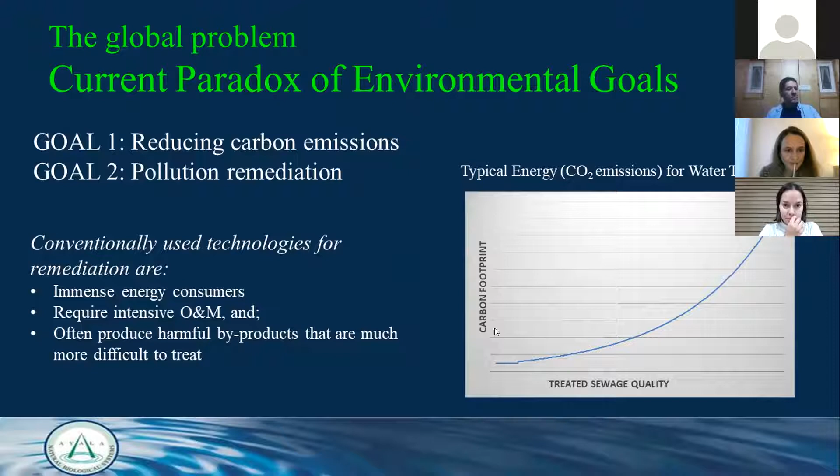So this is actually the graph showing the connection between carbon and water quality. As I said, more water treatment means more energy, and the graph goes up in a never-ending story. This is the way it usually is, and this is how it can be instead.

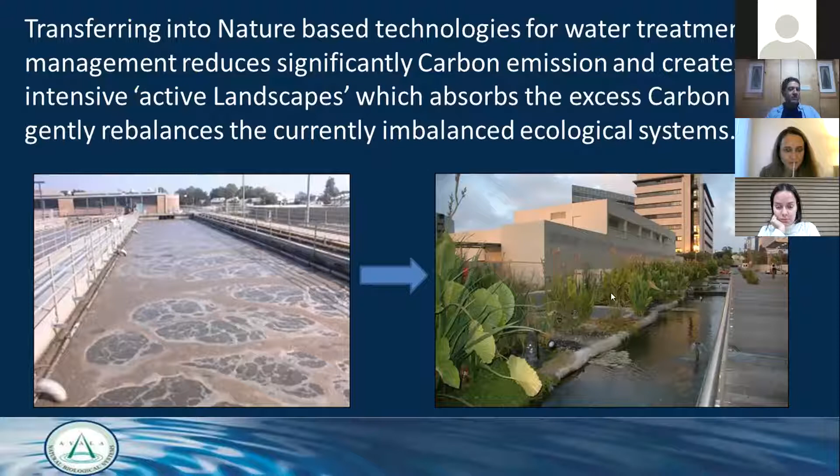This is a system doing the same and much better, treating all kinds of pollutants as part of your landscape. This is a much bigger one, a bigger STP treating something like 5,000 cubic meters per day, and it's part of your landscape. We call it the active landscape.

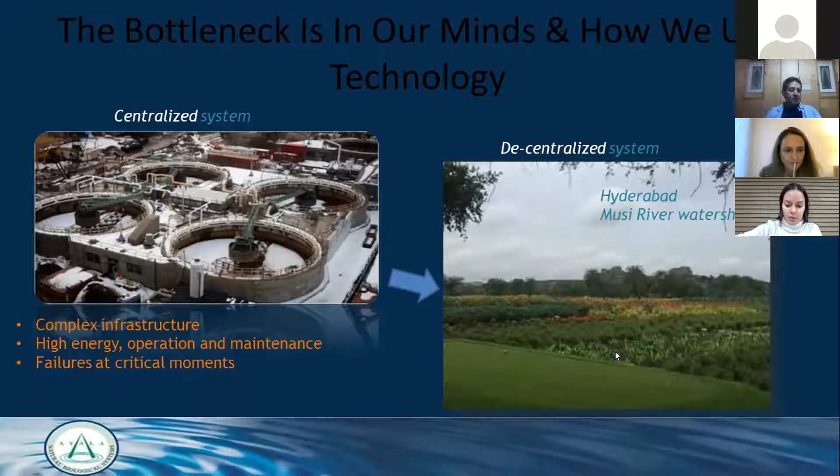But it's much more than just treating water. When talking about the environment today, it's also about skyrocketing carbon footprint, aquifer contamination, lack of water security, aquifer depletion, floodings, air pollution, etc. The solutions given today are each dedicated to one problem, but what we're doing in Ayala is giving a holistic solution for the entire problem at the same time.

You can see this is the architecture of the approach. We're using gravity, as you see over here, using substrates, plants, and special additives to get physical, chemical, and biological filtration all happening at the same time in this system, which is part of your landscape.

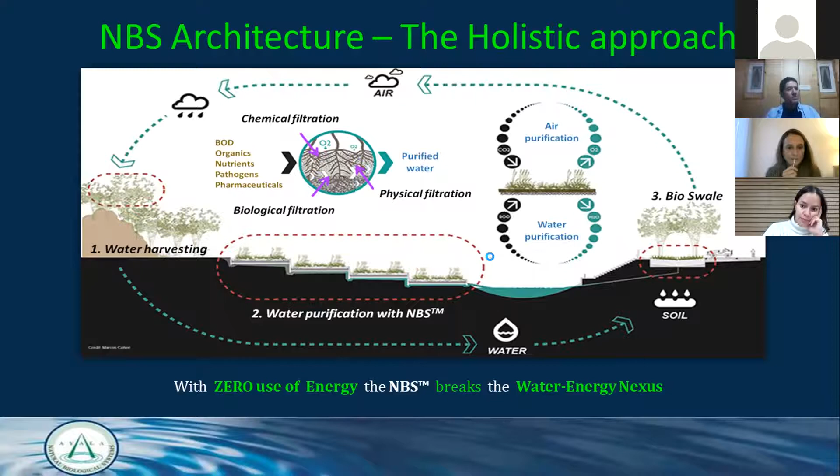This system also, at the same time, harvests rainwater, treats it, and recharges the aquifer simultaneously. There's no energy involved at all, so we're not creating any carbon. On the other hand, we're actually harvesting carbon from the air. The quotient is the opposite—we're reducing carbon while enlarging the green areas.

This is actually the solution. If you think about the world, the only way to reverse climate change is by enlarging green areas and reducing the use of energy. This is the only way to do it.

Nobody thinks about it this way, but when you manufacture something that uses carbon, you're again using technology, creating a never-ending story because it keeps using energy to treat energy, to reduce energy. It's a lock, a Gordian knot.

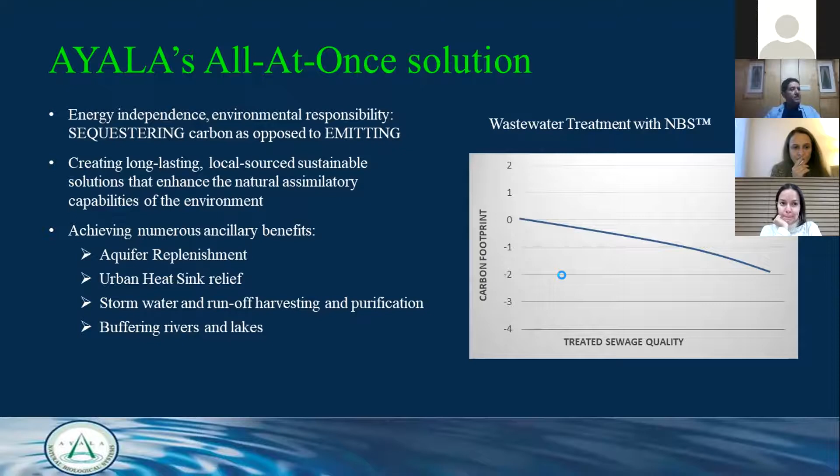But I want to speak about something even harder to approach: New Delhi, in the north part of Delhi, where we got a mandate to design a solution. Something like 8 million people live in this area, and right now sewage runs freely in the canals to the Yamuna River.

We designed a system that becomes part of the landscape, part of everyday life, treating the sewage while it runs all by gravity, creating a powerful green landscape that treats the water and harvests carbon at the same time, with no energy at all.

We stop rainwater upstream to prevent floods downstream. We treat the rainwater and stormwater and recharge the aquifer using special recharging elements. And of course, it's a beautiful park where people can now walk from the city all the way to the Yamuna, which they couldn't do before.

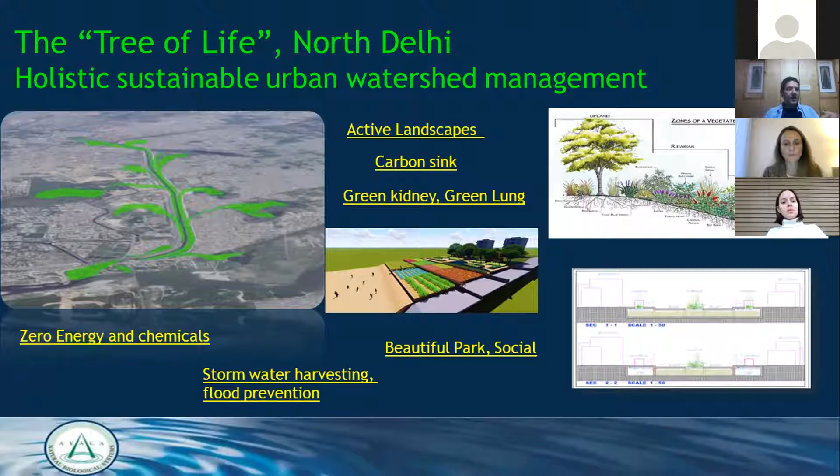These systems are very social—built by the people, using local commodities, and serving the people. This is the only way to keep it alive for a long time.

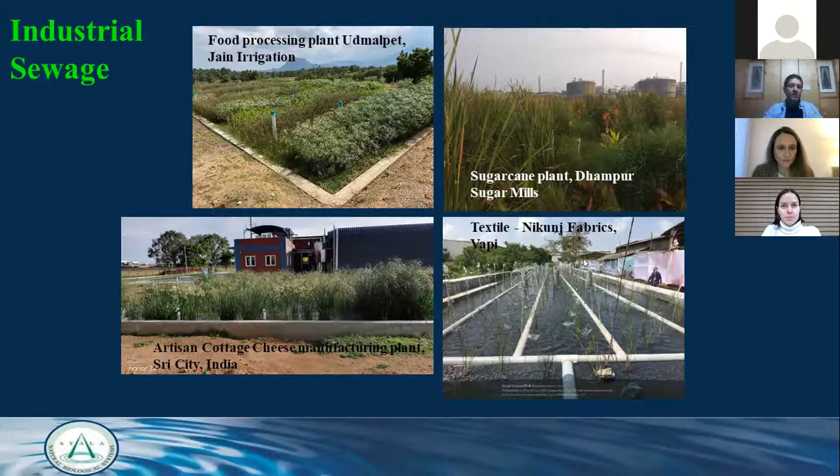And now sugarcane factories, which produce very hard water to treat, food plants, cheese plants, textile - it's all been treated by the same technology. The common thing to all of them: zero use of energy and zero use of chemicals, all by natural means.

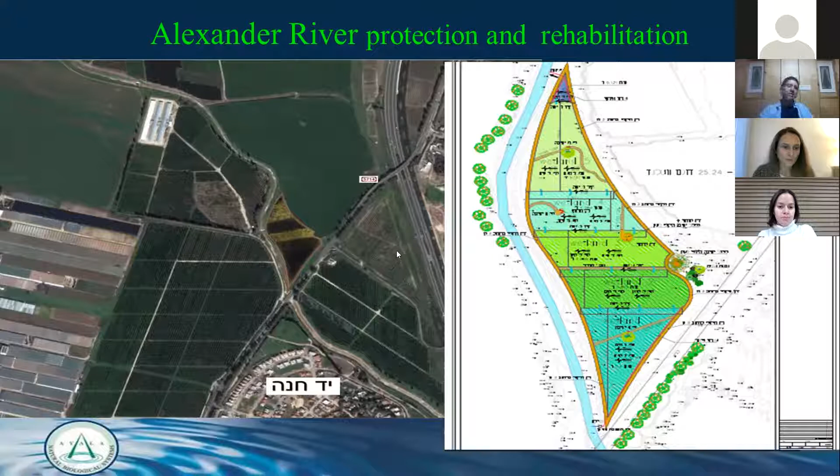This is another river we are doing now in Israel, called the Alexander River. It's one of the main rivers in the center of Israel, getting very raw sewage from Shechem, from the mountains - very bad water, 25,000 cubic meters per day. We're treating it, now under construction, using a system that will run along the river into the Alexander River.

So what I'm trying to show you is that the possibilities are endless. It can be done properly. It can be integrated into our life everywhere - industrial, domestic, agricultural. It becomes part of our life, using zero energy, zero chemicals, and becomes our park, built by the people who live in these places.

So this is actually a complete mind change, but that's the main problem: changing the mindset of decision makers to make it happen. As I showed before, it can be for a private house as well as for the city of New Delhi, which is the biggest populated town in the world today. So it can be anywhere.

And you don't need any conveyance systems. It's a decentralized solution, so you can implement it everywhere - in the city, in the industrial zone. In the end, we're actually introducing nature back into life, but doing it in an active way that works for us very efficiently. I could speak until tomorrow, but if you have any questions, you're welcome.

Yes, we are power consuming, yes we are generating sludge, yes we are treating wastewater in the more conventional ways. There are advantages and disadvantages for both options. It's a matter of scale, a matter of land requirements, and if these are available or not. But I will speak a bit about Aqwise in the world of conventional wastewater treatment.

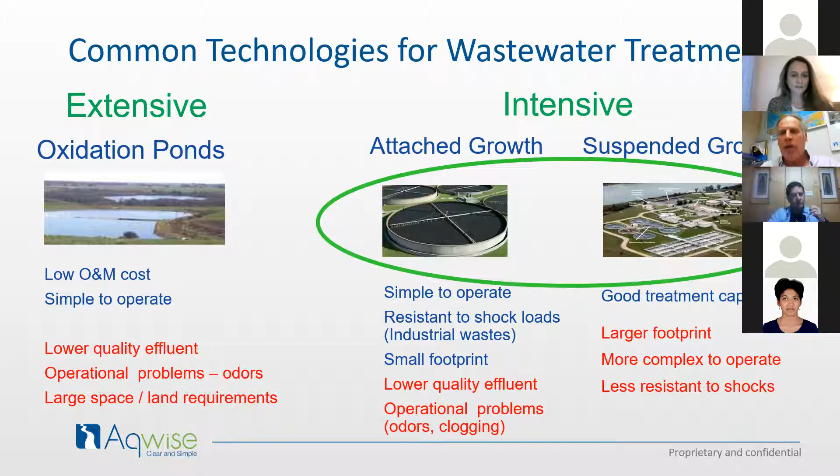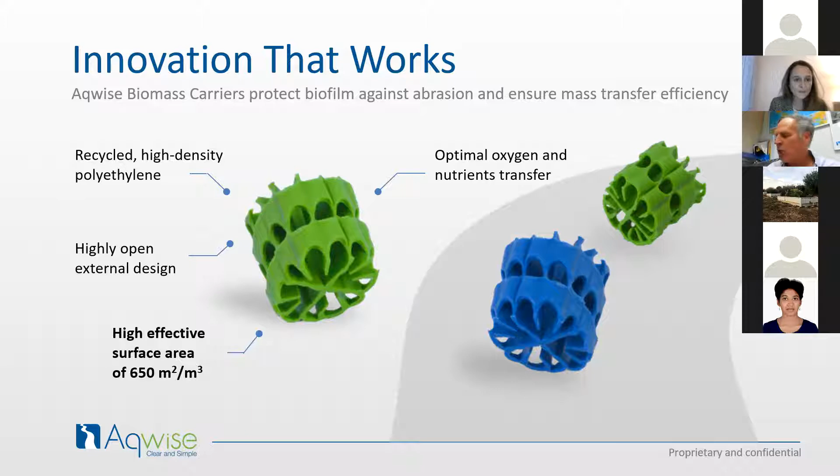In the biological wastewater treatment world, there are different approaches: intensive treatment, attached growth, suspended growth. We won't go into it, but basically Aqwise works in the world we call moving bed bioreactor, where we provide optimal conditions for the biomass that consumes organic material in the wastewater to grow on carriers, providing large surface areas so we can allow for large biological activity in small volumes.

Like I said, ours is power intensive, but it is minimizing space requirements, which is very critical to many customers, especially industrial ones, who have space limitations within their facilities for wastewater treatment units. And also for very large cities that need large volumes and centralized treatment plants, the MBBR technology allows this within a limited footprint.

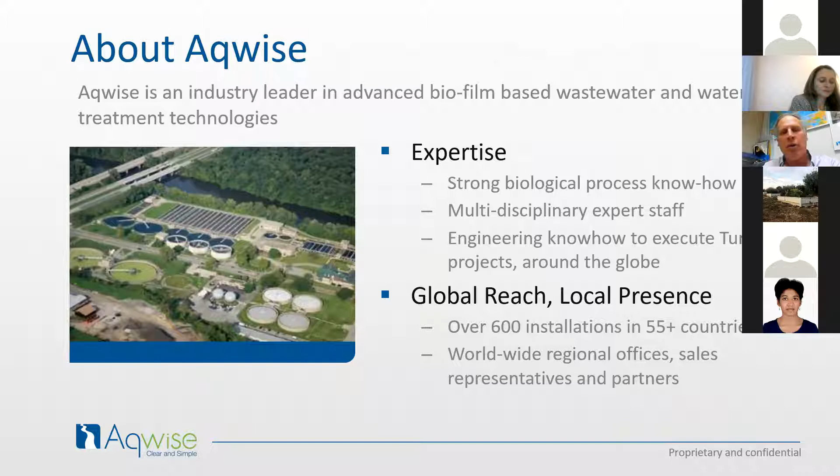I'll run through very quickly who Aqwise are. We are a technology-focused company that started 20 years ago, that has grown into a global company providing solutions all over the world. I won't go into this because it's not really relevant, but this presentation will be shared with you. We have offices worldwide.

We work in both the municipal and industrial sectors, providing solutions for new plants, upgrades, and expansions. Our technology is very suitable for taking existing treatment plants and enabling expansion of capacity or upgrading performance by applying the carriers into systems that use other technologies.

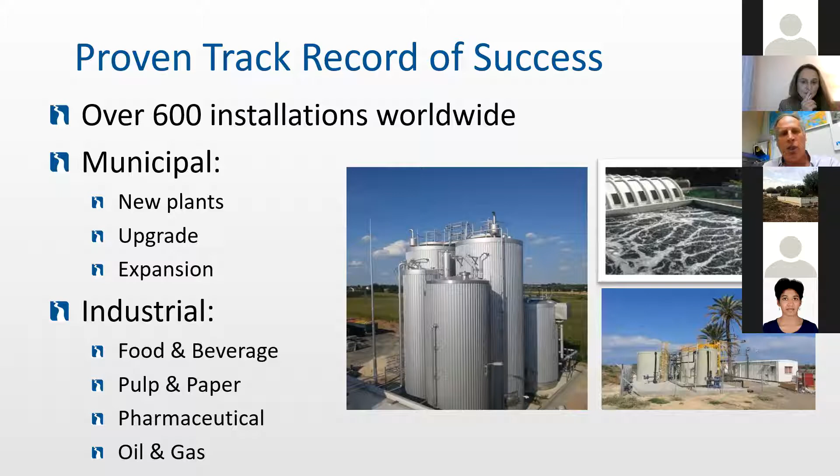This is especially important in large cities where they have increasing populations and have to increase the capacity of their treatment plants. By applying the Aqwise technology, you can do this without needing additional civil works and additional land allocations, which in urban areas is very expensive.

So this is what we do: municipal solutions, retrofitting existing plants, and minimizing civil works.

The same in the industrial sector. We work with industries that have high capacities of wastewater, like pulp and paper plants, like food and beverage factories, where the flow rates are very high, the organic loads are very, very high, and need special attention in order to reach the effluent requirements required by either the environment or the local sewage treatment plant that will accept the treated effluents from the industry.

So again, these are energy intensive processes that use a lot of electricity. They generate sludge, but they do allow industries in large cities to meet their effluent wastewater treatment targets.

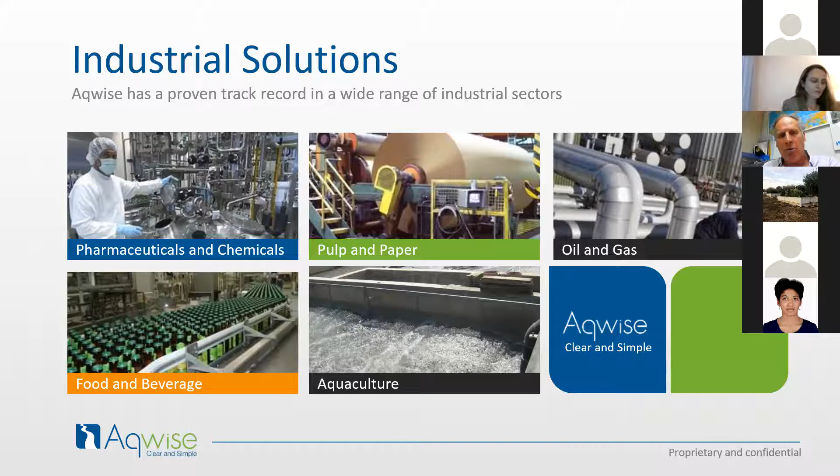Customer benefits: our plants are very small in their footprint, and this is very important to many clients, especially large cities. For example, the city of Hong Kong, because the value of real estate there is so high, they are willing to pay a lot extra to minimize the footprint of their sewage treatment plants because the alternate value of the land is much higher, as they build high-rise buildings on it.

So in dense urban areas, our technology provides an advantage, and also to industries which have limited space for wastewater treatment, they can apply this efficiently with our technology.

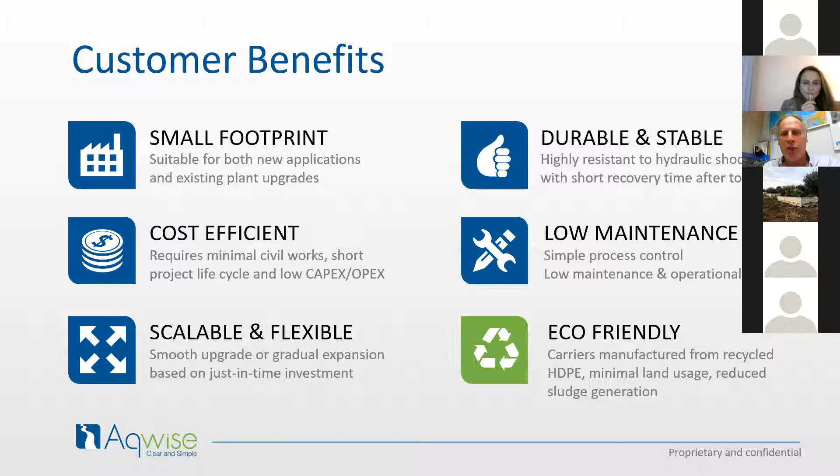Aqwise works in different models, but this may not be relevant to this discussion. We have been involved in the past in a number of World Bank projects through third parties where we have provided our technology, but we can also provide financing and turnkey capabilities.

We have our own in-house R&D facility where we are always developing new ways to apply our carriers and technology to the increasing spectrum of pollutants. They can be from the pharmaceutical industry, or from groundwater pollution with industrial chemicals. We are always advancing our knowledge so that our technology can be applied to all these new challenges facing us in the world of wastewater treatment.

And if you flow with the river 200 kilometers downstream, you'll reach the city of Agra, home of the famous Taj Mahal. And the Yamuna River is the source of drinking water for the people of Agra.

Another case where we apply our technology for drinking water applications is in Israel, and we know these conditions prevail in many places around the world where groundwater is contaminated by nitrates or nutrients from intensive use of fertilizer. We use lots of fertilizer for our crops, and we irrigate the crops, and eventually the excess ammonia, nitrogen, and phosphates percolate into the aquifer and disqualify large amounts of groundwater from being used for drinking water because of the contamination.

We apply our technology to remove nitrates. Nitrates, for those familiar, are what cause what's known as blue baby syndrome. Reducing the nitrate levels allows us to make contaminated aquifer water into safe water for drinking. This is a project we've applied in Israel, and it can be applied in many places where this problem is prevalent.

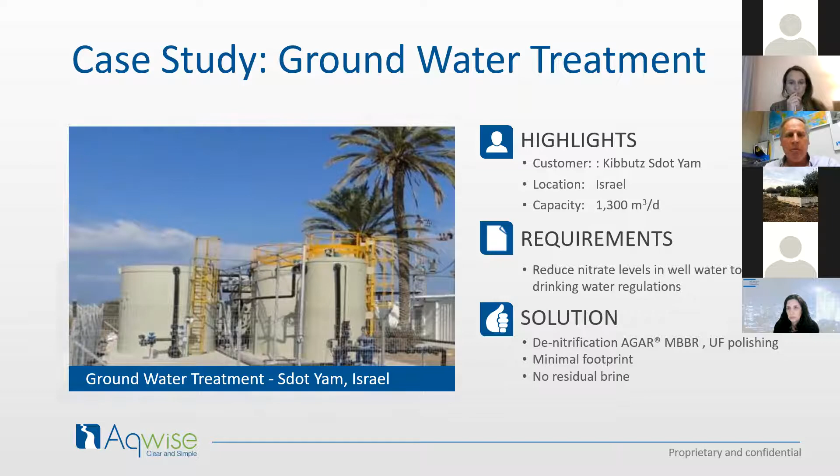These are more common conventional treatment plants. This one in Shaya, in northwest China, where we are treating the water to provide effluent quality that is used for irrigation of fruit orchards around the treatment plant.

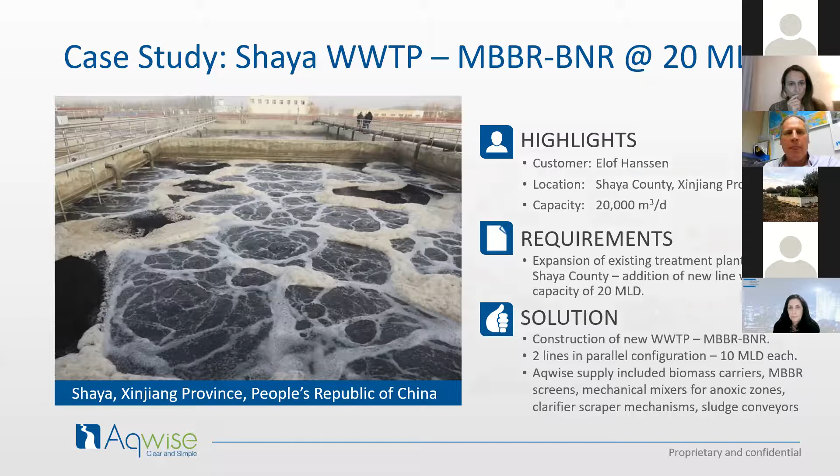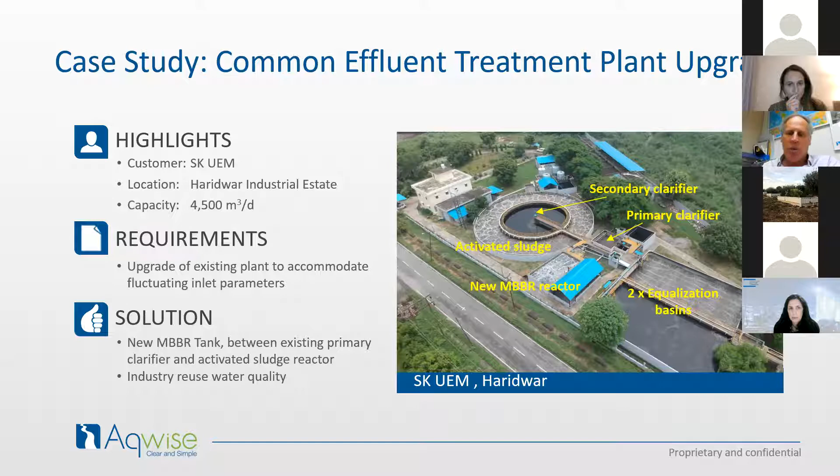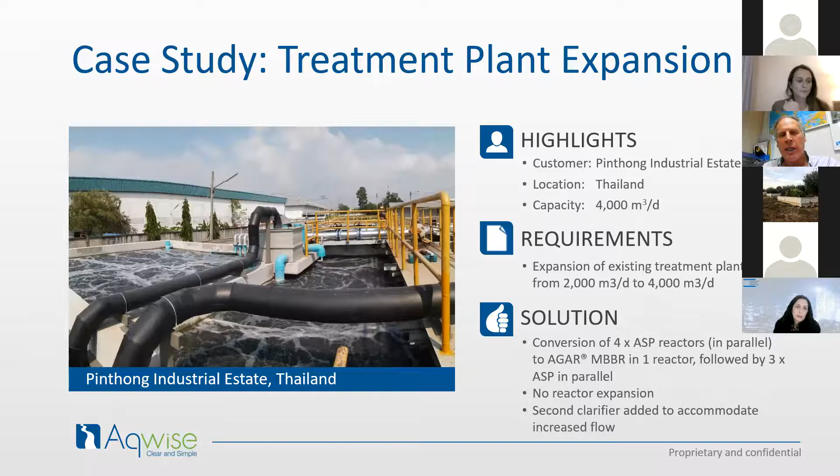Another project in India, this is a treatment plant treating effluents coming from an industrial park. By applying our technology, they could improve the performance of the existing plant and allow expansion of its capacity. So this is all variations on the same thing, where applying our technology allows expansion of existing plants without needing additional civil works or land, in Thailand and in Mexico, and upgrading effluent quality so it can be reused either by agriculture or by industry.

Examples also from industrial applications. This is an apple concentrate factory in Poland. The wastewater is very concentrated, very high strength, and we apply our technologies to generate biogas from the wastewater, which can be reused by the factory for either heat generation or electricity generation.

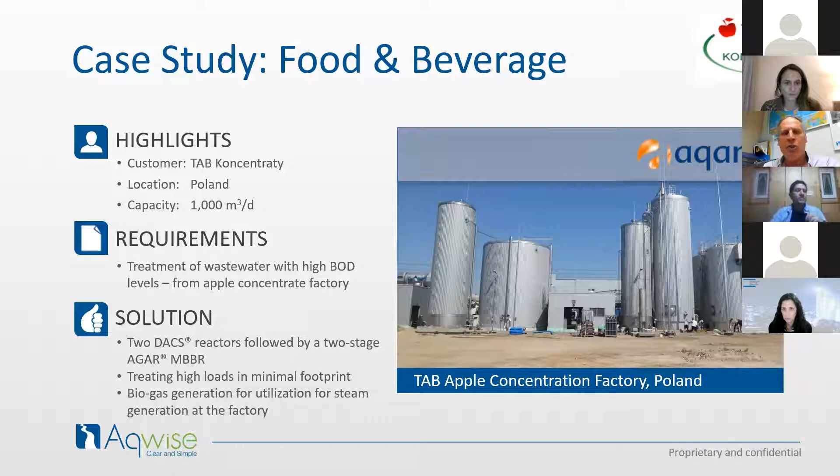Again, the applications are wide. In many places, industries pay high surcharges to the cities for discharging high-strength wastewaters. At some stage, investing in in-house treatment in order to reduce their fees to the city becomes cost-effective. We can do this very simply and very efficiently. So basically, we work in all this realm of high-strength wastewater.

Another application is the field of aquaculture. The industry of aquaculture is blooming all over the world, growing fish and seafood locally on land. These systems require recirculation of the water so that the fish can continue to grow without replacing the water in the ponds. This is something expanding all over the world.

Our technology can be used to enable fish growers to use the same water for an extended period of time without replacing it. This is, of course, very beneficial to their industry and also to the water balance in the environment they're working in.

So this is what we do. Like I said, we're more or less at the other end of the spectrum compared to what you saw before from Ayala. But that's okay, because there's work for everybody, and there are applications suited for all technologies. But this is what we can offer, and we're happy for the opportunity to share it with you.

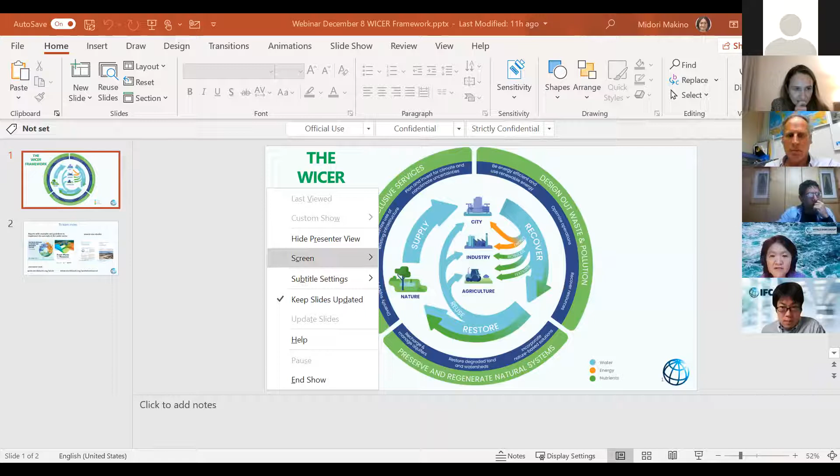Thanks, thank you. So just to show you this WICER framework, let me quickly go through the three outcomes and what actions we're proposing. For the first one, which is to deliver resilient, inclusive services, we propose planning for climate and non-climate uncertainties, maximizing the use of existing infrastructure, and diversifying water supply sources.

The second outcome, on designing out waste and pollution, we're suggesting to be energy efficient and maximize the use of renewable energy. We also want to optimize operations, for example by reducing non-revenue water. We should also recover resources from water and reuse them in the form of treated wastewater, fertilizers, and energy, and so on.

Now finally, we have the third outcome, on preserving and regenerating natural systems. Here we're proposing to restore degraded land and watersheds, recharge and manage aquifers, and incorporate nature-based solutions, which is very central to the first presentation. In order for this to work, we also propose that four or five cross-cutting areas be focused on at the same time.